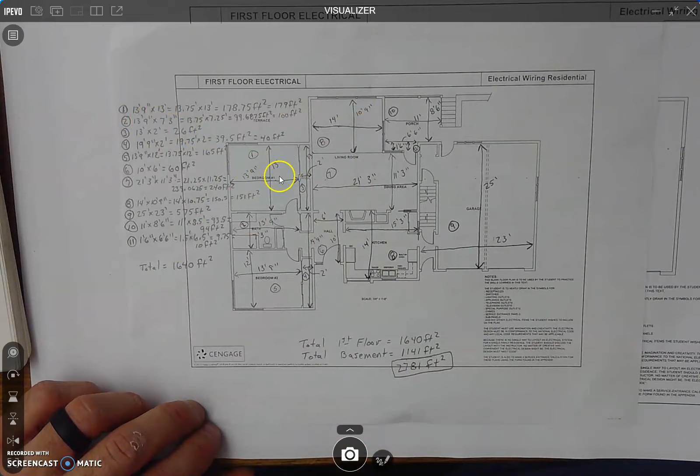So that's the first floor. When I put these numbers in, just for example, 13 feet 9 inches times 13 - you have to convert the 9 inches to a decimal, so 13.75 feet times 13 feet. That's how many square feet I get, round up. I did that for all of them, added them all up, and that's what I got on the first floor.

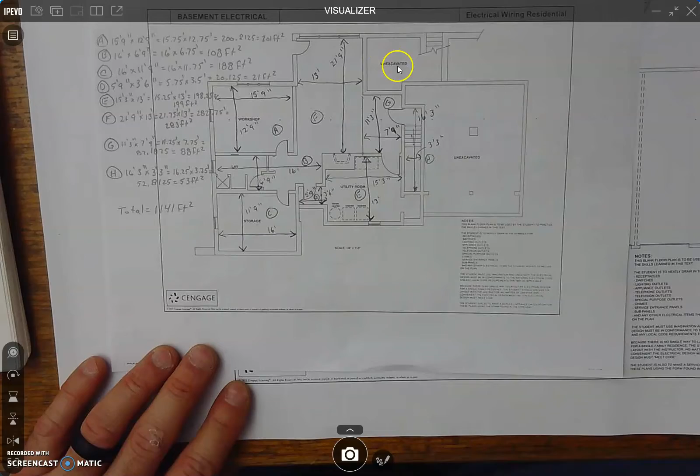This is what I got in the basement. Notice I did not do where it says unexcavated, so there is no basement there - this is your garage, and this is under your porch, so those don't have basements. I got that, and then I added those two together, and I got 2,781 square feet in the first floor and the basement.

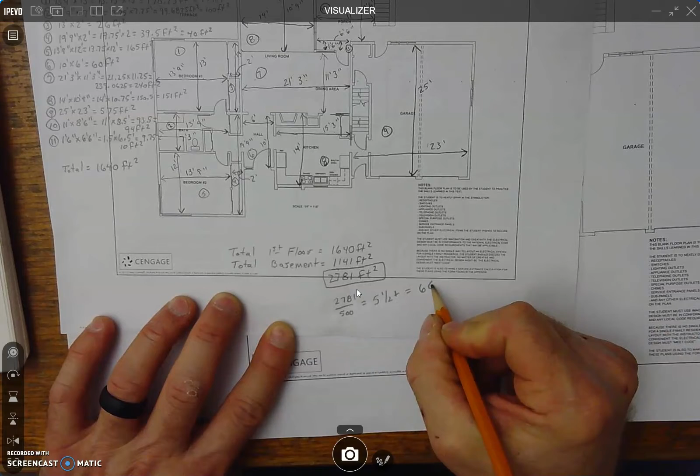So if we use that figure to find out how many general purpose circuits we need - that's why we did all that - you take 2,781 and divide it by 500, and you're going to get 5, and then whatever fraction, like 5.5. So that's going to equal 6 general purpose circuits.

So in this house, we're going to have 6 general purpose circuits. Remember, general purpose circuits are circuits that have outlets and lights, usually outlets that are going to be 15 amps or less, or it could be a 20 amp circuit. But most of the 20 amp circuits are going to be going to places where we'd use more electricity, like a shop, a kitchen, or a bathroom, where we'd have equipment that would pull more than 15 amps.

When we pull those individual circuits to a bathroom, kitchen, or shop, we're probably going to pull at least 12 gauge wire, possibly even bigger, and often each circuit will serve one thing. Remember, those are called small appliance circuits, which we'd do in a kitchen where they'd serve fewer outlets. Maybe you'll have at least 2 small appliance circuits in this home.

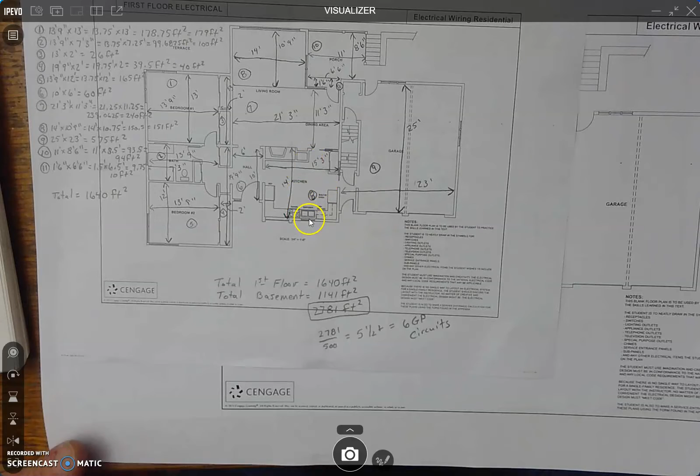You're probably going to have 2 just in the kitchen, and you might have one for the bathroom here, and here's the bathroom in the basement. I would probably put 3 in this house - 1 for the bathroom, since the bathrooms are stacked right on top of one another, you could run one over and share it, and then 2 in the kitchen.

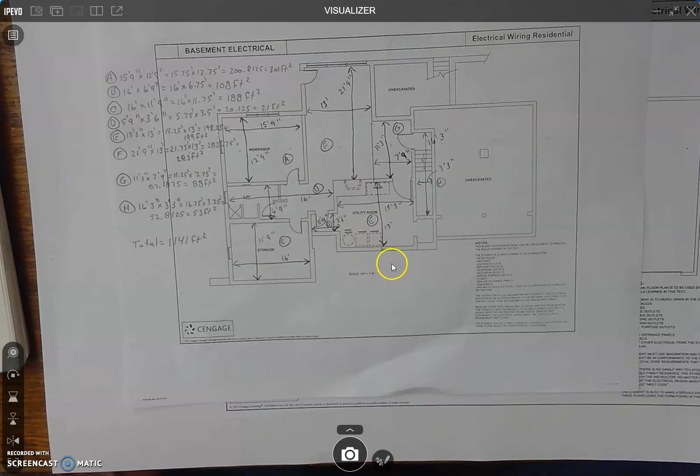So I'd have 3 small appliance circuits and 6 general purpose circuits, plus - depending on what kind of setup - I could run a small appliance circuit over here to my washer and dryer as well, so maybe I'll have 4 small appliance circuits. This water heater is going to be an individual equipment circuit, so I'll run one directly to that.

Wherever my furnace is - it doesn't have it labeled in here, but my furnace is probably going to be in my utility room, maybe in this closet, door there, somewhere in this room - I would run an individual circuit to that as well. So we have some things to get to.

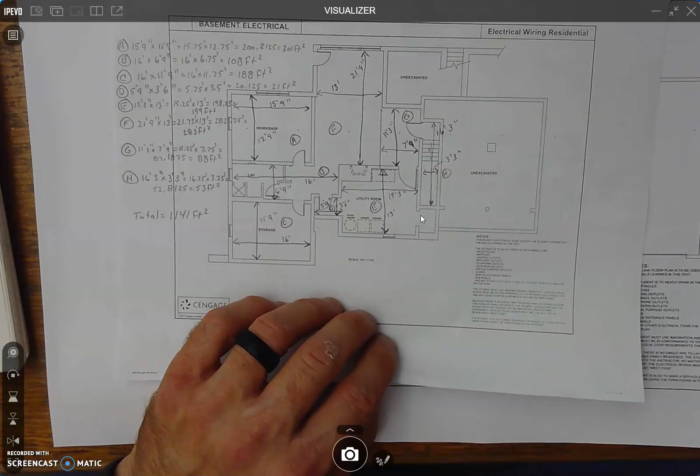All I want you worrying about right now are general purpose circuits. So this is what you need. What we're going to end up doing here, I'm going to give you multiple sheets like this. I want you just focusing on the first floor right now, so you're going to do first floor general purpose circuitry.

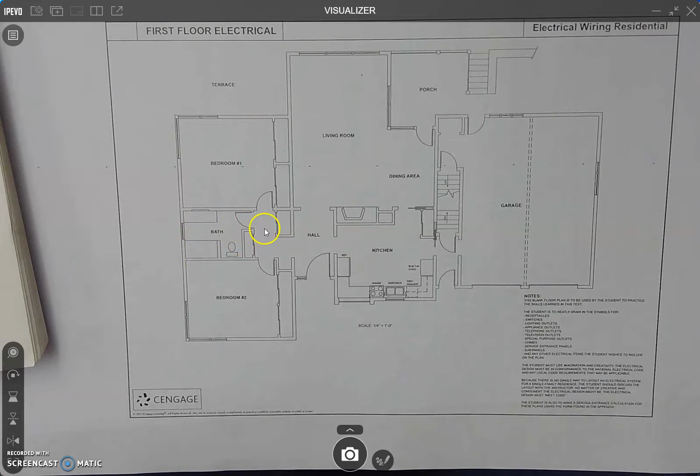Obviously, if you're going to use a bathroom as a small appliance circuit, you're not going to put outlets in here. Maybe the light in here would be on a general purpose circuit, but not the outlets - depends on what kind of light you have in there. If it's a light and a fan, maybe it'll be on a small appliance circuit. But what you're going to do is what we have here.

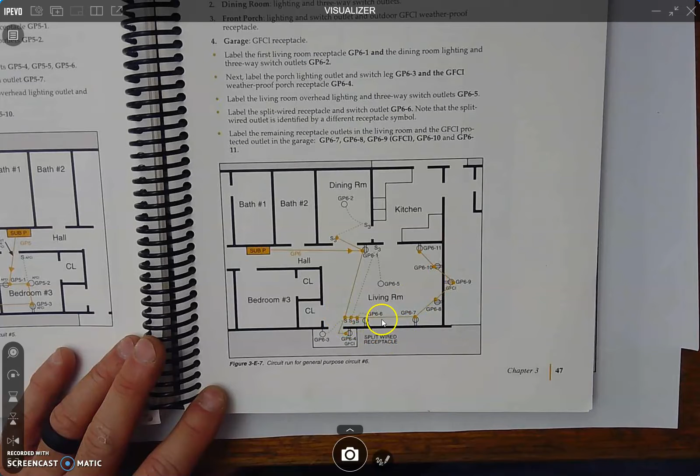So anyway, this is how you draw them. You come off of our panel, or our sub-panel, and you'll break up and decide where you want things. Now on this particular circuit, what do they got? They have 11 things on there.

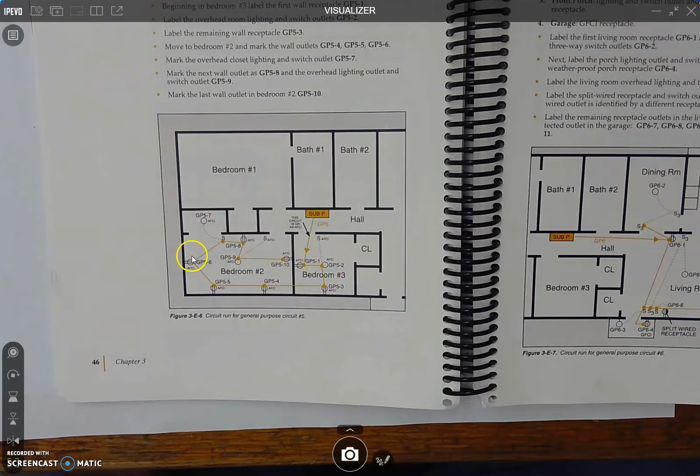So what you want to do first, before you start breaking it up into GP6 or GP5, I'll give you another example here. On this one, here's GP5, right? These are the different things on there. As you see, they're outlets and lights and switch circuits. It goes 1, 2, 3, 4, 5, 6, or 7. 7 is this light with that switch.

8, 9, 10. So this one has 10 on it. This one over here has 11 on it. So they don't have to be exactly equal in how you break them up, but they have to be somewhat close within a device or two on each one. So what you're going to do first, okay, your goal for today is to do this.

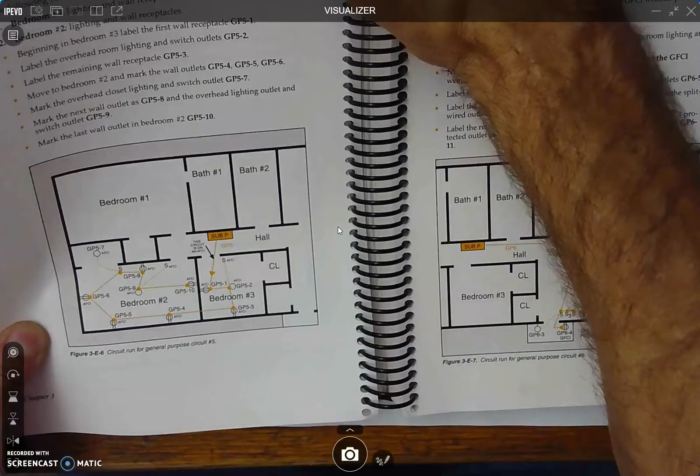You have to have this out. Now you needed this both to figure this stuff out, to figure out how many general purpose circuits, but these measurements are also going to be important so we know how many outlets we have to have along each wall, right? Each wall—you can never be more than 6 feet away from an outlet. So you have to place them along here so that you can make that happen.

Okay? Now, when you have these doors, you're not going to have an outlet there. You're going to have an outlet somewhere close to this corner, right? And you're going to have an outlet somewhere close to this door. And everywhere in between, you have to be no more than 12 feet apart on those. You could put more, not fewer.

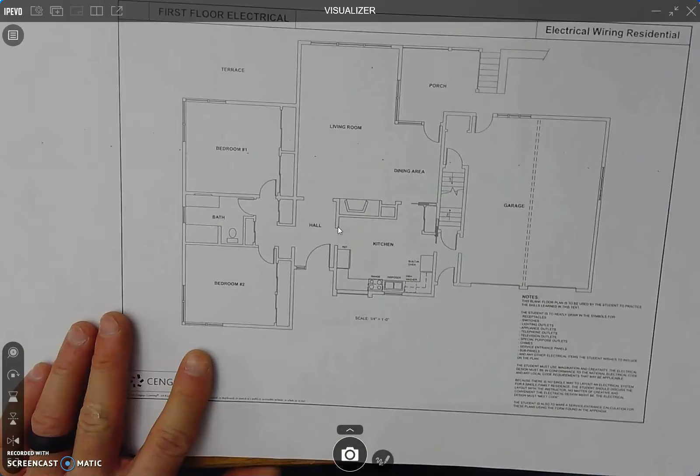These are windows. If the windows are up high enough off the floor, you can put an outlet underneath your window. That is okay. And remember, if you're going to put an outlet in—I'm going to give you a sheet this size because I don't want to run off a whole bunch of these. I'm going to give you a sheet this size without the numbers, and you're going to just draw in your outlets. You're going to draw in where you want lights, and you're going to draw in where you want switches and what you want switched.

Once you get all of them drawn, then you'll break it off into different general purpose circuits. Remember, just outlets and lights in non-small appliance circuit rooms. So your bedrooms are all going to be on there, usually living room, dining room, probably your porch, and possibly even your garage are going to be on these general purpose circuits.

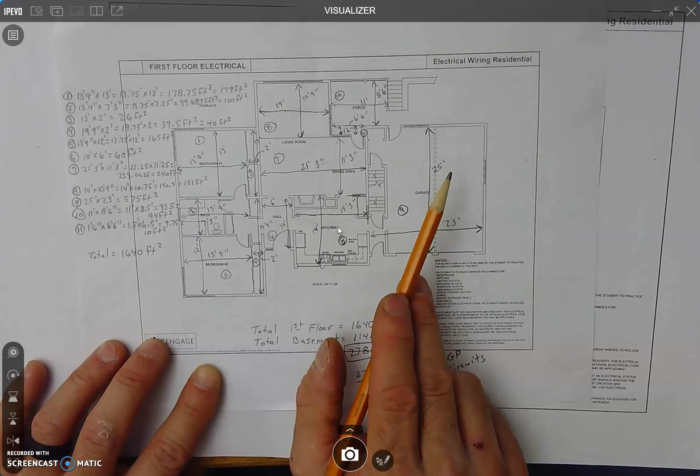Okay? You might have a light at the top of this step here. You can put a light on the wall if you wanted in a three-way switch circuit. I don't know, you're going to have to think about that. You have exterior lights that you might want to place. Here's your front porch, here's your back porch. Maybe you want to put a light out here on the other side. These are windows, on the other side of these, windows here. Or maybe it would go over here.

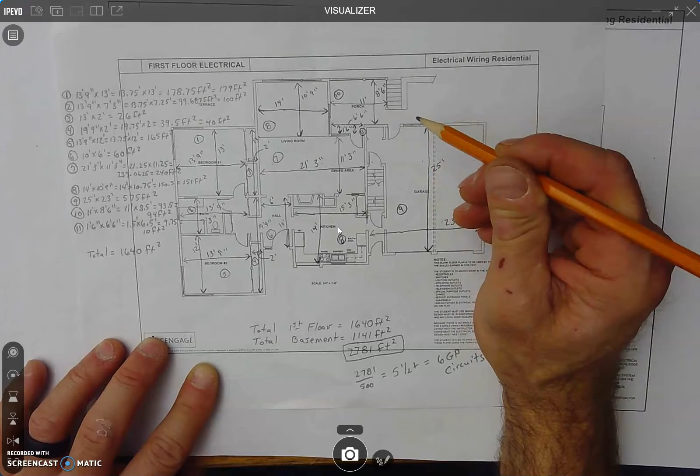It doesn't really tell you what goes right here, but you guys are going to have to decide where you want things. Do you want lights on the front of your garage? Here are your two garage doors. Do you want lights there? Do you want a light by this door? If you put a light right here, it would serve both for that and for the garages. So I don't know how you want to do this.

There is no real rule, except for the fact that you have to have a certain number of outlets and certain rooms have to have overhead lights. I would think about putting maybe more than one overhead light in some of these rooms.

Right now you don't need to do this, but if you put can lights in, just put a circle and you put a C in it, that's a can light — a recessed light, the ones that go up into the ceiling. So you can put as many of those in as you want, if you want those to go up inside your ceiling.

So your job is to take this, figure out where you want outlets, where you want lights, and where you want switches. You're going to get a clean version.

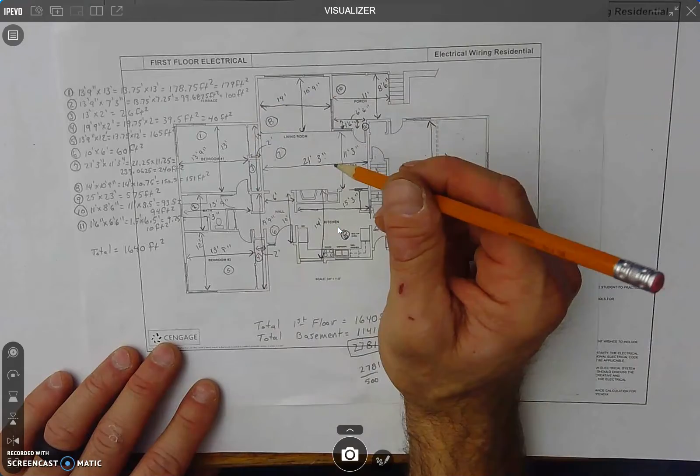For instance, you might want an outlet right here. This is a duplex outlet, right? That's what they're drawn like. Maybe you want an outlet right here. Make sure you have more than enough.

Along there — this is your TV, right? You're probably going to want to have an outlet here.

And then maybe, if this is my living room and this is my dining area, maybe I want to have pendant lights, marked P, here. And maybe I just want them switched. I'm just giving you an example here. So this would go like this, right?

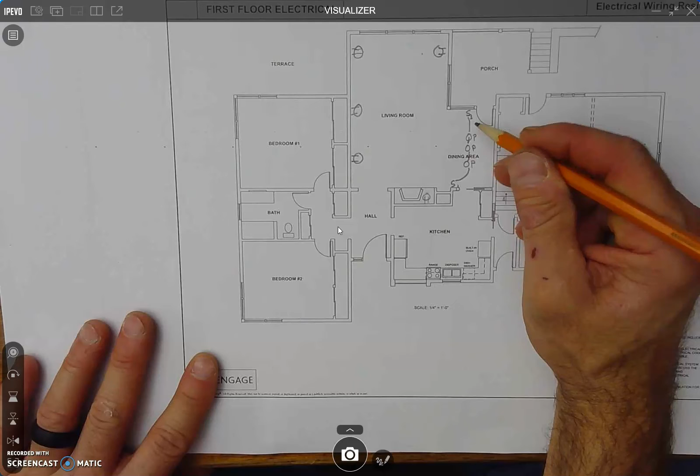Does that make sense? Now I haven't fed this yet, and you don't even right now need to draw these lines. Just draw where you want switches, where you want lights, and where you want outlets.

You need to figure out what you want in here. That's your first step. You should be able to get pretty darn close.

And if you want a switched outlet where part of it is switched, like we've been wiring up, you just color half of it in. And you've got to know where you want that switch to be, though.

Do you want lights in your closets? You can put lights in your closets. You can even go and put outlets in your bathroom and lights in your bathroom.

We're going to put those on different kinds of circuits. Same with your kitchen — you can go ahead and put your outlets in here, but you have to then come back, and we're not going to make those general purpose circuits. We'll make those small appliance circuits.

So your job: figure out where you want outlets, where you want lights, where you want switches. Start really thinking about it. You guys have lived in enough houses now — you should be able to do this. Just come up with where you want things.

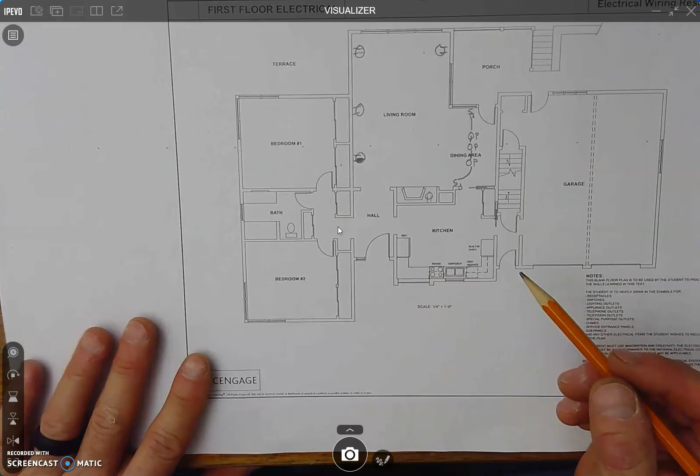We will break it off into circuits later. Just for your information, we're probably going to put our panel — we have to have a furnace down here somewhere, but we're probably going to put our electrical panel right here. So that's our SEP.

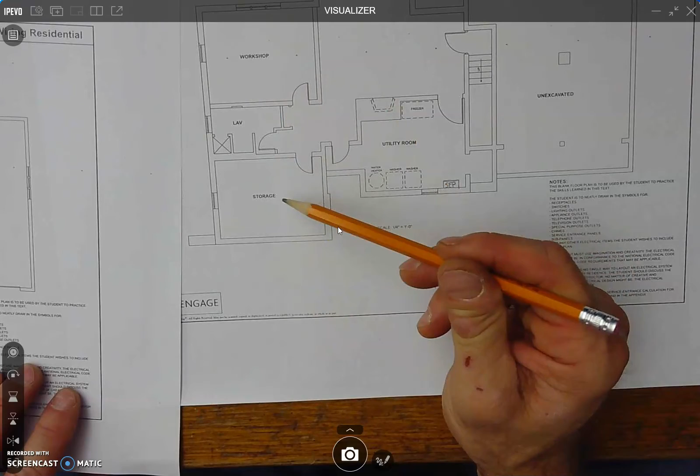But again, here's a workshop — you might want small appliance circuits there. Storage — this is not a living space, so I'm not sure you have to have an outlet every 6 feet.

This obviously is going to be living space, so you might want to have outlets out there every 6 feet.

So work on this. You aren't going to have a big piece — you're going to have these small pieces. I'm going to make sure you have enough.

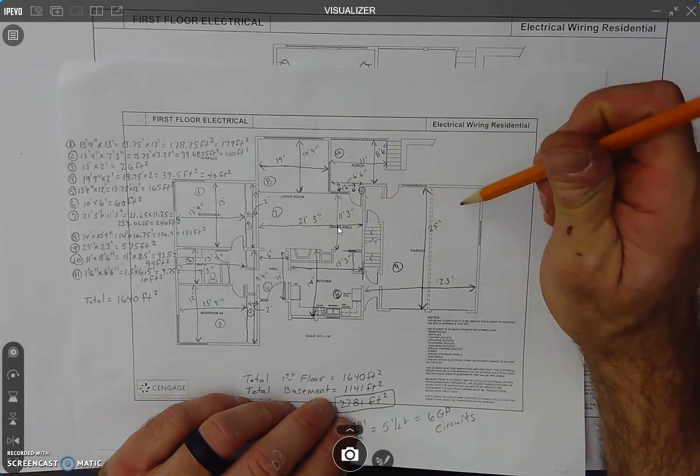You should put your name on it, and you should have one of these with your name on it. You should have the one I'm going to have you get tomorrow with your name on it too, and do this. You need to keep all these in one place because we're going to come back and use these to do our actual layout on our larger pieces of paper.

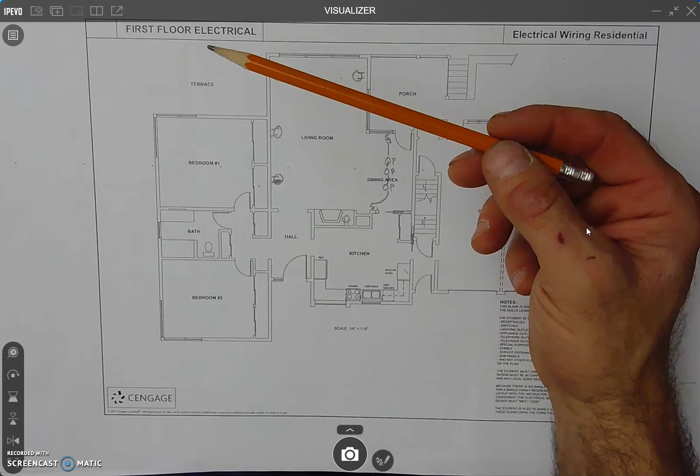We're probably going to put 2 to 3 general purpose circuits on each sheet of paper, and then we'll get you a new sheet of paper, and you'll put your other general purpose circuits on that one. So you might have 3 first floor pages that have circuits drawn on them.